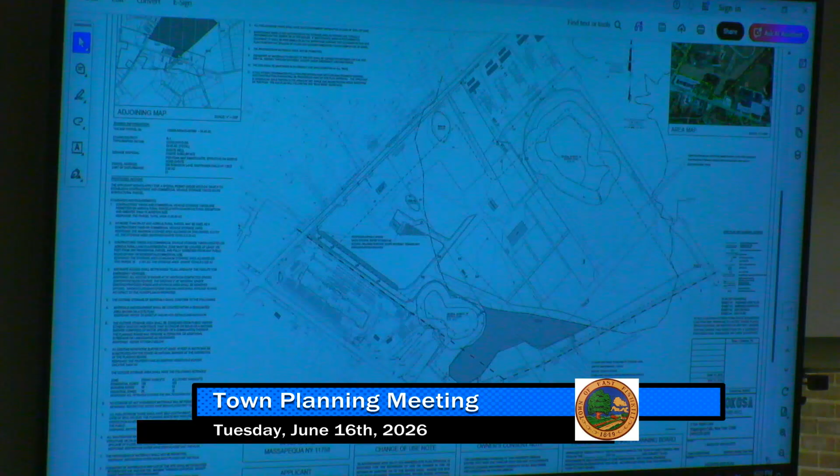And the people here, I know that you live next to him. I get it. I think this new proposal that they came up with the town, from the conversations and from watching the video of last week, it moves it completely away from all of you. It's a great idea that the town and the Metzgers came up with, listening to everybody's comments. The driveway, the lights will go out straight ahead.

It should impact nobody. And to clean that farm up and bring it back to its normal glory would be just amazing. If you go up to the Metzger's farm now, that's history right there. It's always spotless. The fences are always mended, even though when everybody drives through them, they're usually fixed within a week. And in order to do that, it costs a lot of money. And I hope that Glenn is able to get this property and farm it.

I'm sure a lot of people don't know that the person who's been planting the corn on that farm for the last 5 years is Glenn Metzger. He's been farming that land already for 5 years through the permission of the owner. And they came to him and said, look, we want to get out. The owner of the lands live in Massapequa. They have nothing to do with up here.

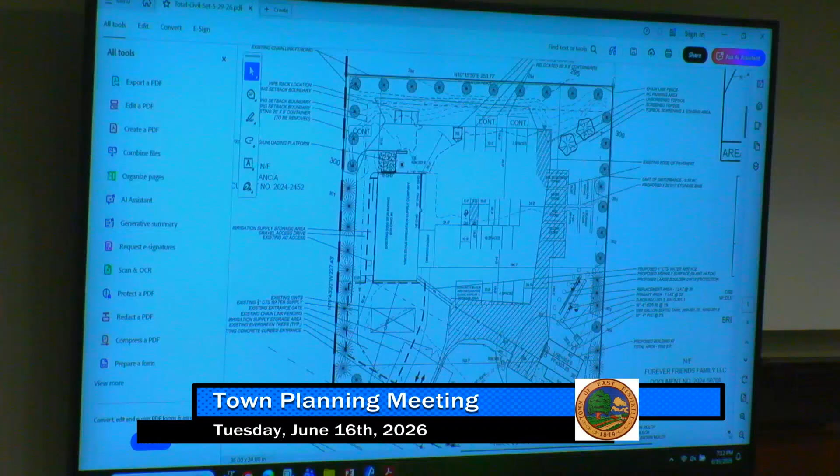There is an existing chain link fence that already borders the property. So he was going to try to just remove the deceased trees, replant in kind with the same species that's in the front of the property. He's got a pretty heavy landscape in front that shields a lot of the area in the back, and again, same concept, if there's a tree in disrepair, just take it out and put a new one in.

We didn't think anything would be required above and beyond that, but we wanted to defer to the board. So if you have a chance to be out there, we would amend as required. Are you doing anything to beautify the front of the property a little bit? Will the old tractor continue to sit in the front? That's a board's call, what does the board think? I'm just wondering, there's some. It's an interesting artifact that probably just needs a little bit of prettying up, right? I will pass it on.

Where exactly is that located on your property? It's like right near the entrance, on the right-hand side. Can't miss it. It's nice, it's not painted John Deere green or anything, I think it's rusted.

Any questions or comments from board members? Anything from our professionals? So at the last meeting, we declared our intent, so I think we need to declare a lead agency for Alpine. And then also, if the board feels it's ready, they would also potentially consider scheduling a public hearing.

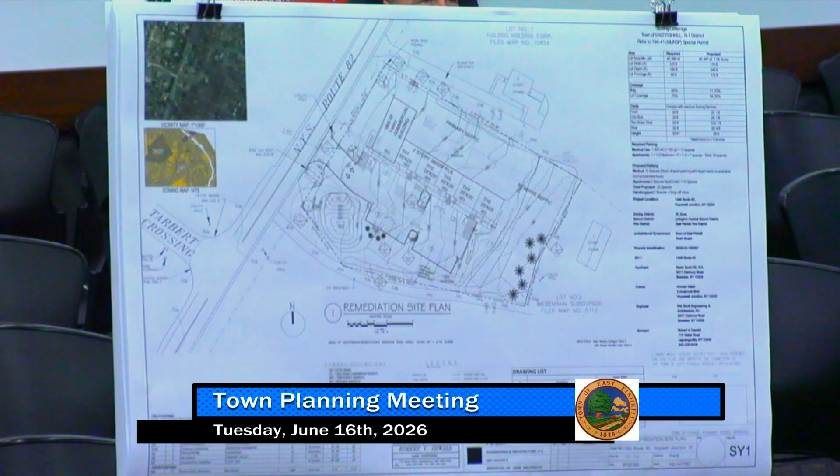So what we did is we took this project and we proposed as shown on the boards. Let me pull a little closer.

So what we proposed in this particular project is an 1,800 square foot multi-use building in the front, and behind it we had 5, 25 by 25 two-story units integrated into the existing fish market building, which is a two-story concrete building with a stepped foundation.

What we provided for you was a complete site plan, stormwater management, initial septics, architecturals, and if I could just run through that really quickly with you, we can talk about what's on the plan.

We also like to talk about something else, which is permitted in the MURSP special permit plan. We also put together a site plan which depicted no commercial and 100% multifamily maintained within the existing fish market building. And we can talk about that as well.

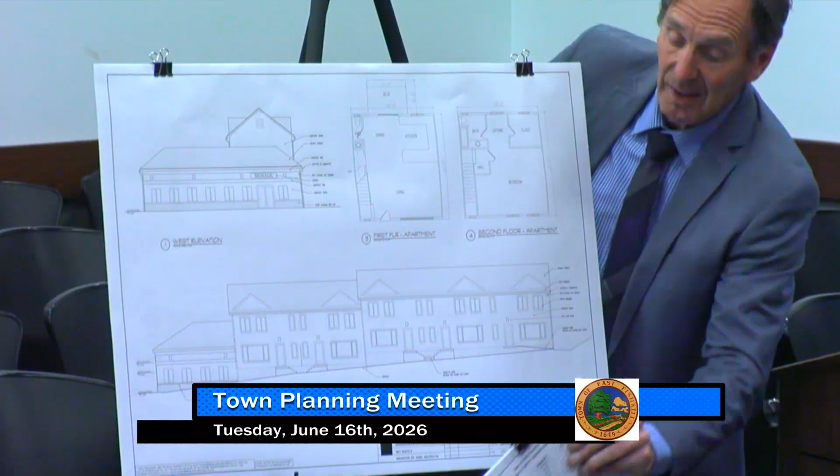So while we were designing this project, we decided to look, with some input from your planner, at an option where we would only develop residential units within the building itself. That would mean eliminating the 1,800 square foot commercial use in the front and replacing it with 6 units in a linear fashion, matching the shape of the existing building. We had a plan for you as well which we submitted, showing this type of development.

What are the advantages of this type of development? Well, we're farther back from the roadway with this option, and we need significantly less parking because it's 1.5 parking spaces per unit.

We would propose 2 parking spaces per unit that would go with this theme, and we still have extra parking with this proposal. It makes access for emergency purposes much easier because we don't need that much of a parking field, and we can take our dumpster and put it, we got plenty of room to play with here because we're only basically developing the side of the parking which faces the building. The side away from the building, on the other side of the aisle, is really for overflow parking, extra parking for potential users on the site.

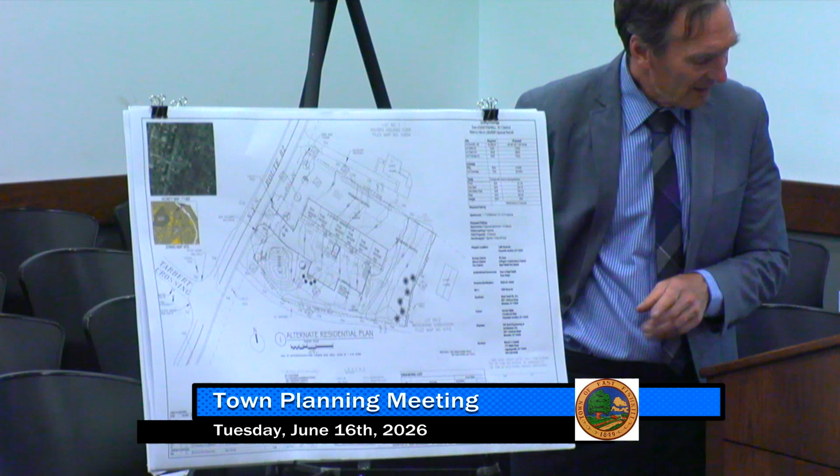We submitted a SWPPP, stormwater management, our test data with the septic testing. We have some minor comments from your consultants, mainly dealing with the fire marshal's concern of where you put a dumpster and where we have an emergency access way. Very easy to achieve because we've got extra capacity for parking on both plans. I'd love to answer any questions if I could, and maybe we can get some direction from the board on what they'd like to look at, in terms of all residential or residential and commercial.

So I can just give you a little bit of background - for those of you that haven't figured out, it's the former Fish Market building. The special permit was put in place specifically to help property owners with underutilized commercial buildings that were historically located in residential districts, because it can put you in a difficult situation if the commercial use goes out and you haven't used the commercial use for years and it sits there and gets dilapidated, and then it affects the residential properties around it because of the fact that they have to go by a building that isn't being utilized or underutilized.

So the special permit does give you some discretion as the planning board. One of the things it allows you to do is consider mixed-use buildings, but also consider a building, if you so decide, to allow it to be completely residential. And that's something that you would have to determine if you wanted to waive the commercial requirement. I think that you need to consider the context of the neighborhood, the look of the building, and all of those types of things in your consideration.

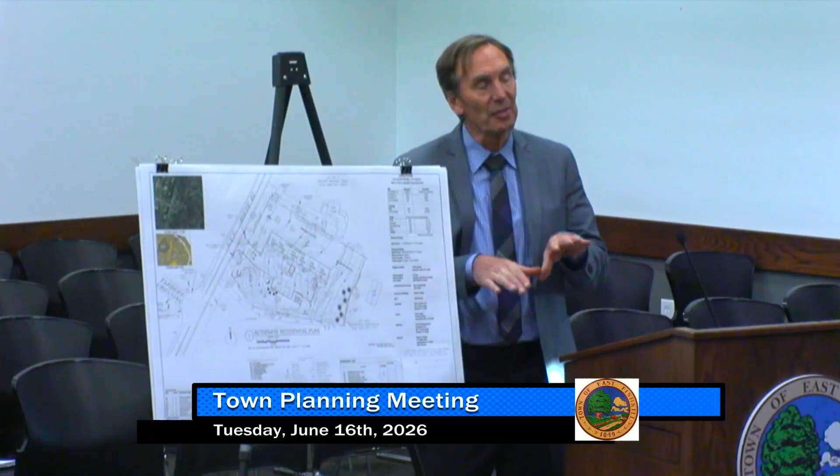It will probably be utilized. It's a step foundation. We designed around everything to do with the foundation. We've met that criteria. The same steps as exist. Everything's the same in that regard. In terms of structure, to be candid with you, we designed a way to solve all the structural problems on the building, but it might be more cost effective for us to just rebuild the building, but keep the footprint and the foundation as much as possible. That'd be ideal for us.

So the six townhouse or apartment plan, does that exist in the same footprint as the five apartments on the commercial and apartments plan? Yeah, sure. And therefore, they're smaller, I take it?

Yeah, the only difference between the two site plans is there's a little stub extended to the north of the 1,800 square foot building. But this all fits in the footprint, it's just a bit added to the north, while this building is exactly within the footprint of the existing building.

So Plan A exceeds the footprint, Plan B stays inside of it. Because the ordinance states that the residential has to be in an existing building, but the commercial does not. That's how the ordinance reads. So that means you can take an existing building, put all the residential you want, but you can always add commercial to that per your special permit.

And so we utilized that option for Plan A, and it's fully complying with the setbacks and coverage, etc. And then we're showing you the advantages if we just did all residential here, that we'd have less development on the site.

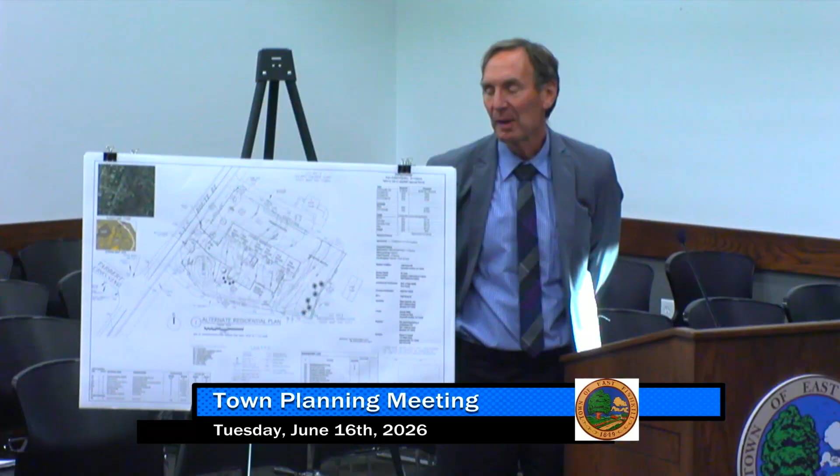We're working on an option, because if you had to make a road around the building, you'd have no building left. It'd be a parking lot with a building in the middle of it. So we're trying to work on a compromise to make this work.

In other municipalities I've worked with, fire trucks are allowed to back up onto the road because there's enough security after the fire event is over that we're allowed to back the trucks off the property onto the highway. Our concern is being able to get the apparatus in and out during the incident. There's no public water there.

Yes, we would like to see hooking to McDowell Crossing that has the water supply across the street. But to be able to run our tankers and switch their motion in and out easily in that parking lot and around is better, for the obvious reason that if you have a fire, you may have to make rescues off the back of the building.

Yes, and do it with a ladder truck. It's much easier and quicker than carrying a 25, 24, 35-foot ladder all the way around the building to reach the other floors. DOT doesn't like this, but we could give you a stub off the highway on the other side of the building and just drive in there.

A pull-off on the north side of the building. We had to look at that. We're flexible, and we're also not sure we'll ever get water from across the street. That's going to be a long shot, but I could do an ISO calc on this and determine the fire tank size. We could do an underground fire tank if we had to. So we're willing to work with it.

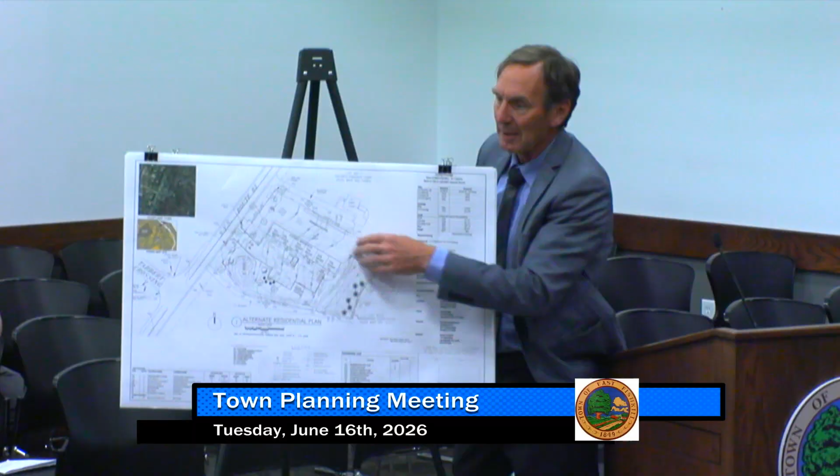Is it just overgrowth or? Yeah, there's one pine tree right here which is kind of falling apart, and the rest of the back of the property is just basically brush and various components of past work.

Is it possible to do some screening to screen that house? Yeah, we did put a boxwood buffer along this whole area where the house is to buffer that. We can't put trees in the septic area. We have to be 10 feet away from the septic area with trees, since they do terrible things by going into the septic field itself.

But we are proposing a solid 10-foot buffer in compliance with the regs along the property line to buffer that. What about a fence? Yeah, we have no problem with a fence. I hate putting fences in, to be honest with you. They're pretty ugly, because all they can see right here is just...

Little porches which are 10 feet wide, on grade, no railing around them. We're setting the porches so they're less than 24 inches above grade, so you don't need a railing, and it sort of steps down onto a lawn area. I'm trying to make it as simple and innocuous as possible in terms of development, focusing on the grass buffer area.

But also, we're not just referring to sight, but it would also be sound, a bit of a buffer, if people will be back there and they are going to enjoy the apartment, which they rightfully can do. Correct. That would definitely—you have all those people that would be out on the back, whatever it may be, party, whatever. Fencing.

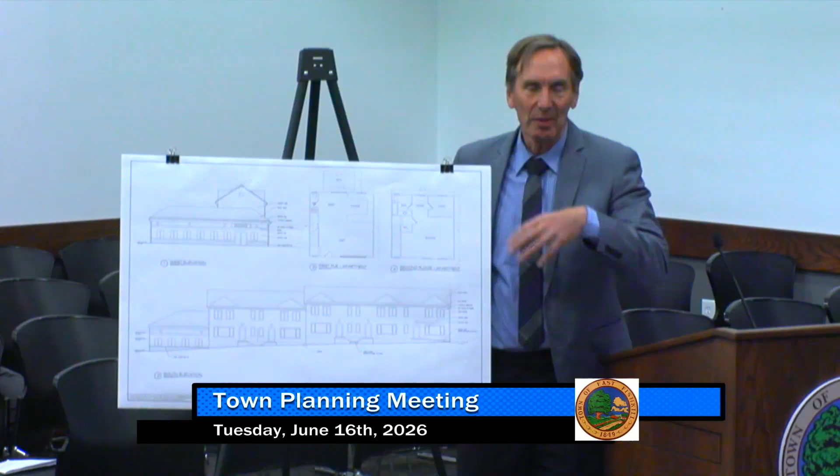Well, the lot parallels pretty much the building shape. It's a little bit wide in the front but narrows out in the back. But what's the width? About... I would say, real quickly, about 140 feet frontage and a little over 110 feet in the rear.

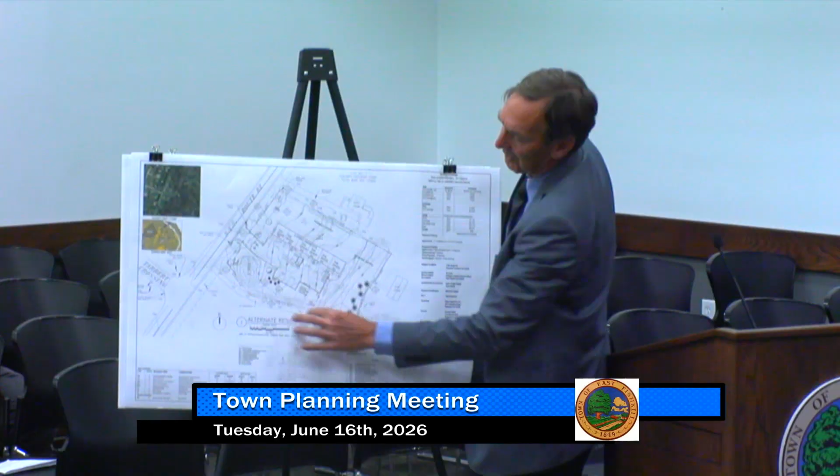50 feet to build something. 160 feet wide here, in that part.

I think the best use for all of this is to try to make the concept of this special permit work. It kind of makes sense, but we're the poster child for it. I think if we could all work together, which we would love to do, we can bring this back and make it a nice element in the town. We're open to any comments or suggestions to make it a better place, because we want it to be a showcase, not an empty building on the side of the road.

Right, okay. If you could work with Jackie Keenan, she could try to herd all of us together on a date that might work for you as well, for a site visit. Very good.

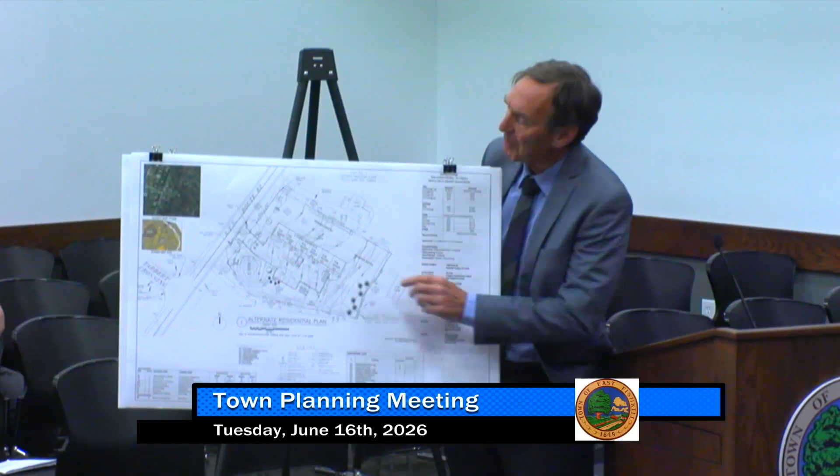Yes, we've done all the testing for it, and we've got one more. We didn't do testing toward the front of the property. We weren't sure if it's commercial or residential. We didn't punch any holes in the existing pavement, but our next step with the health department would be to add additional holes where pavement is going to be removed.

What about where their entrance onto 82? They're probably going to be circulated to DOT. Then DOT will have to determine if they're going to have any requirements or require any changes to the curb cut, since it's going to potentially be short. So they're going to probably weigh in on something.

So we have to decide as a board which plan we support informally? The way they can do all residential is if the planning board waives the requirement for the commercial, and that's in the special permit, you have the discretion to do that.

Is there a public hearing before that? No, you would direct them which way you want it to do. You can also waive some of the setbacks and other dimensional requirements if it makes the project a better project. But that's why I encourage you guys to read the intent of it, to make sure that you're following the intent when you're considering waiving anything.

So then here tonight, would we be voting to move this forward? You may want additional information, like a site visit. I think the site visit would be appropriate. I agree. I think you've heard some comments that give you an idea of intent, how we're leaning, perhaps a bit.